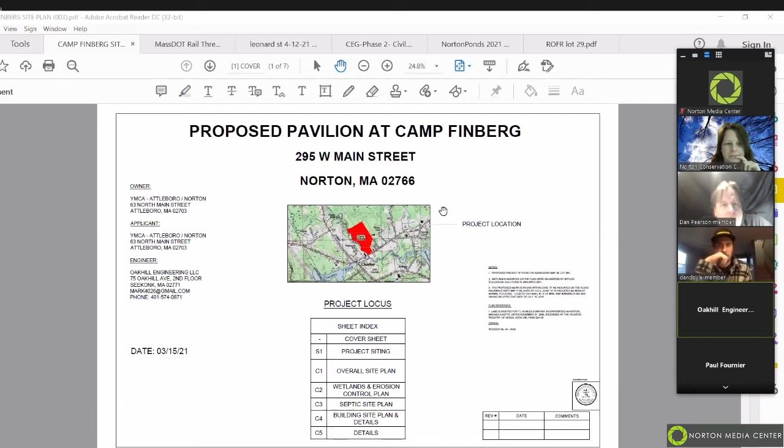Jen, if you want to go to C2, or you can start at C1. Yeah, that's fine. So the intent of this project is the Y hopes to build a 60 by 100 camp pavilion. It is basically a pole barn structure. It's uninsulated, just a one-season building.

The goal for this is to be able to give kids more shelter in inclement weather. This structure is actually being built on an area of the campground that was supposed to be a tennis court and never ended up being a tennis court, so it's just a large paved area.

So what we're intending on doing on this project is building the structure and removing the remaining pavement, so we are going to reduce our impervious footprint on this site. The other thing we're going to do is there will be restrooms out in this area. Currently, the closest restroom is the Lodge House, which is almost 1,000 feet away, so we are putting men's and women's restrooms in this building.

With that comes some infrastructure upgrades. That includes a service line that's coming off of their existing 8-inch main, traveling down the gravel path to the building, and there will also be an associated Title V septic with that building, which will be found, as shown on the plan, to the north of the camp pavilion.

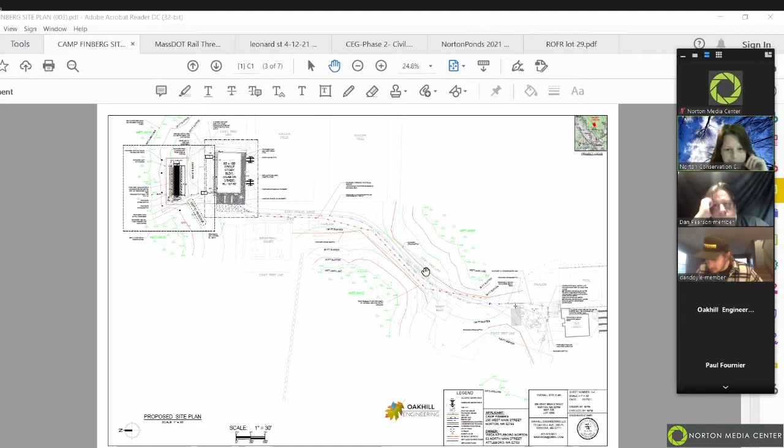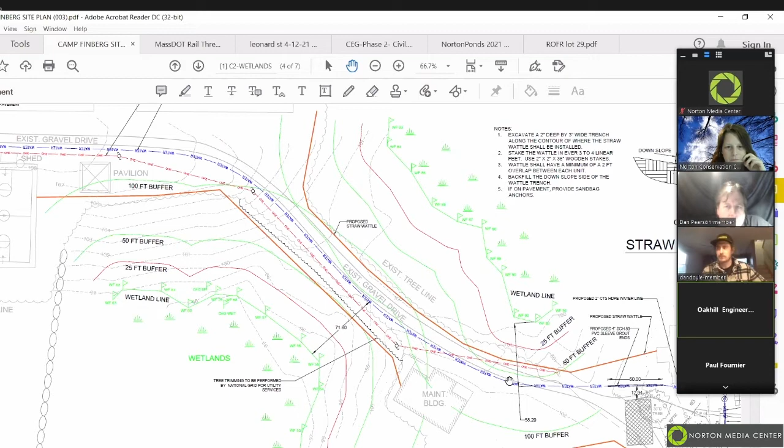That's as close as we get. Most of the work will be falling within the 100 to 50 foot buffer zone for the utility upgrades. Where we're installing the septic system will fall within the 100-foot buffer. None of the septic components will fall within the 50-foot buffer, but there will be some grading and tree clearing associated with that.

The reason we chose this area for the septic, we dug other test pits around the property. We dug to the west behind, going towards the stream where the basketball courts are, and that material is actually a different type of material. A little bit south, right where it says existing tree line and where my scale is — in that general area is where we originally wanted to find decent material. We did not find good material over there. It was glacial till with really high groundwater.

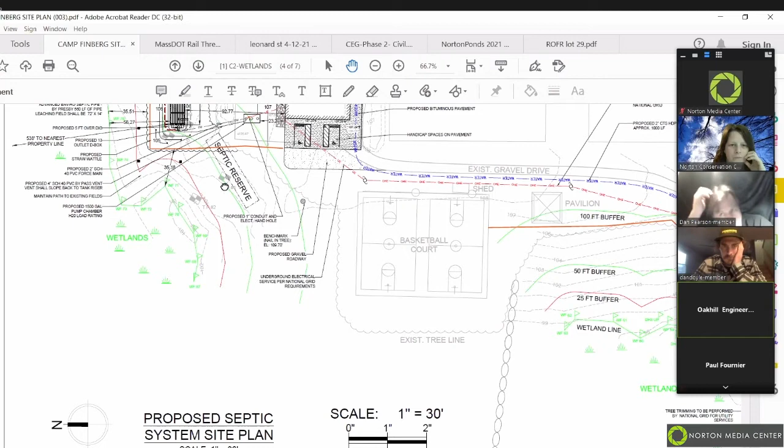As we went more towards the site, we then found the test pits that are logged here, and they were found in sandy, good draining material — higher groundwater, but good draining material. Up there, we didn't really investigate as much, just the logistics of the site, because there's a drainage swale around the sides. We didn't want to have to pump and go through that area.

Also another reason why we picked this area is it gave us enough distance between the existing tree line where we could still shield it with a tree line area. This system will be a little bit raised because of the high groundwater, and we wanted to be able to shield it visually.

Okay, all the work total is less than an acre, is that correct? Correct, yep. And no changes to the swale? No changes to the swale, no — well, except for this, what's happening here, we're maintaining the swale. We're going to put a little bit of an earth bridge so that the kids can cross it and they're not running through the swale. And then there'll be a post and rope fence that kind of corrals them there.

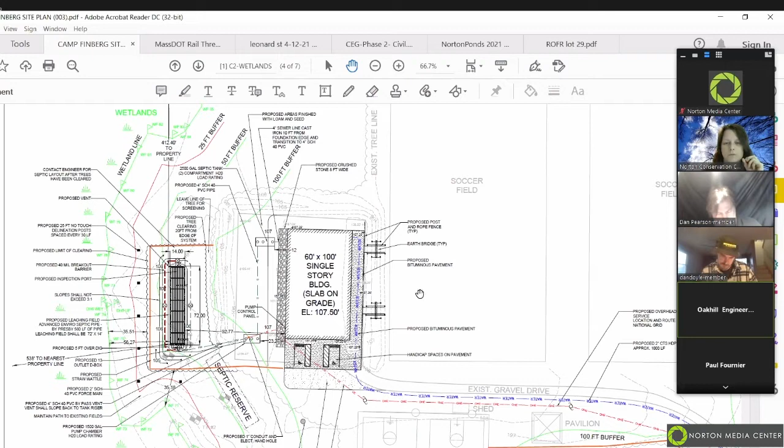Okay, is there a detail for that? Yep, go to, I believe it's on the last sheet. Don't hold me to it, but...

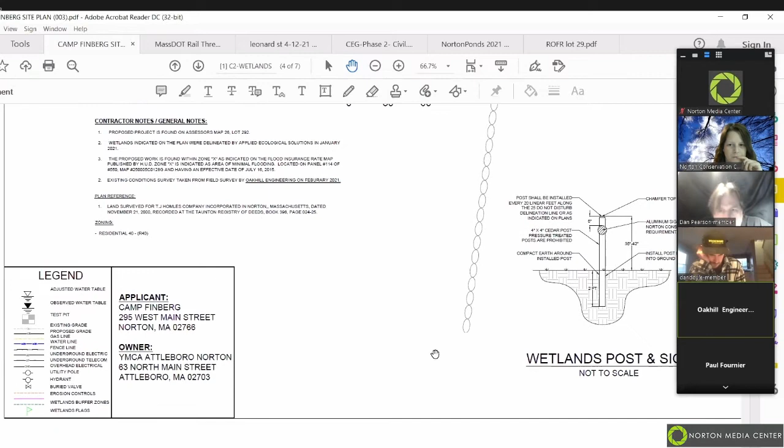This was the plan you gave me for presentation. Oh, okay — if you know the big set that I get, or the PDF I had sent the other day, it had I think 7 sheets in it. All right, so you think it's on the last plan?

Yeah, it's likely on C5, and it's also called out. More details are called out in elevations, called out on — I believe it's C4, and that's the building zoom-in portion.

And is this a culvert underneath here? Yes, that is an HDPE pipe. What size is it? I believe it's 18.

Okay, and just that the post, the no disturbance zone visual barrier — the post should be up here at the edge of work, at the limit of work. Okay, so you want — yep, that's not an issue. So yeah, it's on, Jennifer, it's on C4.

And we call out for an 18-inch HDPE N12 dual wall pipe. It's a 20-foot stick.

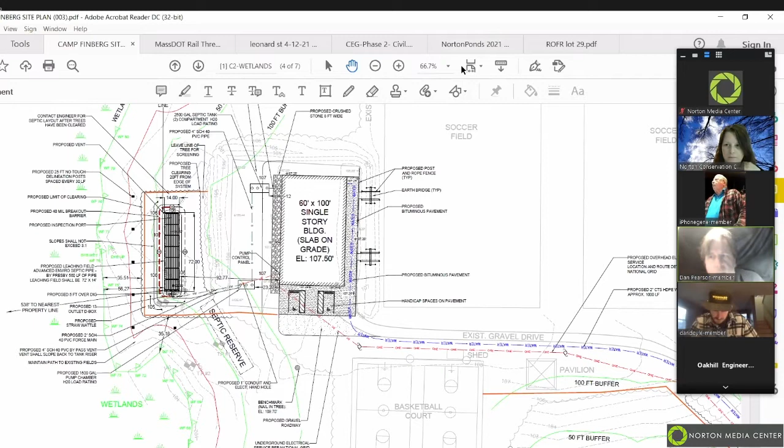I see participants, but I don't see anything in the chat box. So does that mean we're free and clear? I guess I'm supposed to look for hands. Yeah, the raise hands button is also under the participants tab at the bottom, next to the yes and no's. Okay.

So will that show up automatically? It'll show up in your little Brady Bunch box, in the corner. Okay, there are no hands raised, Dan. Okay, thank you, so I don't see any hand raised.

I guess then we should entertain a motion to continue file 250-1074. What are you continuing for, Dan? Are you looking for other information, or do you have any other questions? If not, you can close.

I'm sorry, when I say continue, what I meant was, would anyone like to make a motion to close? I'll make the motion to close file number 250-1074. Dan Doyle makes a motion to close. Do I hear a second? I'll second, Gene Blood. Okay, motion passes.

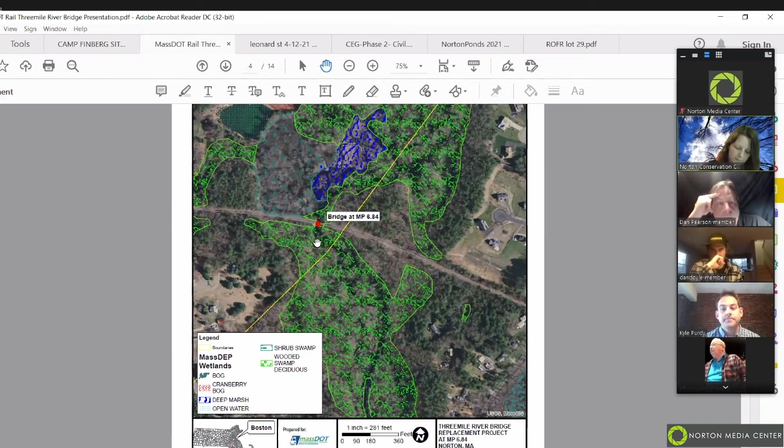We'll get a more specific delineation map later, but this is just the Mass DEP wetlands layer. So you can imagine next to a heightened embankment, you have BVW on both sides of the embankment. And our widening will take place within just the 100-foot buffer zone to BVW and bank, as well as the riverfront area, but there will be no impacts to wetlands or water bodies, or the bank. Thank you, yeah.

So the blue line is perennial stream, a tributary to Threemile River shown on the top half of the site plan. The orange is not only our temporary erosion control - here we have coir log at the toe of slope - but also the addition of ballast to widen the embankment and fill in some of the natural swales that come from off of the track. And then the green is delineated BVW.

So you can see a majority of our impacts here. We total within the 100-foot buffer zone, 5,300 square feet of permanent fill, and that's within MassDOT's existing right of way.

Is this the 100 foot? Yep. And is that also the inner riparian? Yep. And then your purple is the 200. Yeah. And then you can see that very thin line - there's a little bit of embankment filling right adjacent to the existing track right now, but a majority is it to maintain the stability leading up to the bridge.

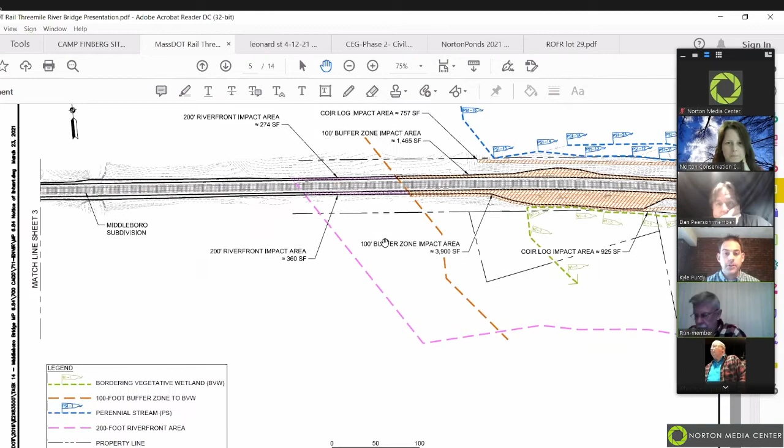So then if you go to the next sheet, we wanted to provide this to the commission so they fully understand the purpose and need of the project. So this is the bridge replacement. It's deteriorating, and that's being handled with Mass DEP underneath the water quality certification.

So as part of the bond bill, we wanted to lead first with the track widening before we go ahead and show DEP these associated impacts that will require water quality cert. So you can see similarly there's widening next to the adjacent abutments, but just wanted to give a better overview of what's delineated on site, what exists. This is the main portion of Threemile River, as well as associated BVW on either side located at the toe of slope.

And then if you go to the next sheet, you can see that dotted black line that comes in at an angle - that's the municipal line. So here's just showing just a laydown area that's already cleared. Doing our field reconnaissance, we saw that this would not require any tree clearing to stage material in this area. And then also east, you see there's also track widening, and this is all in Taunton.

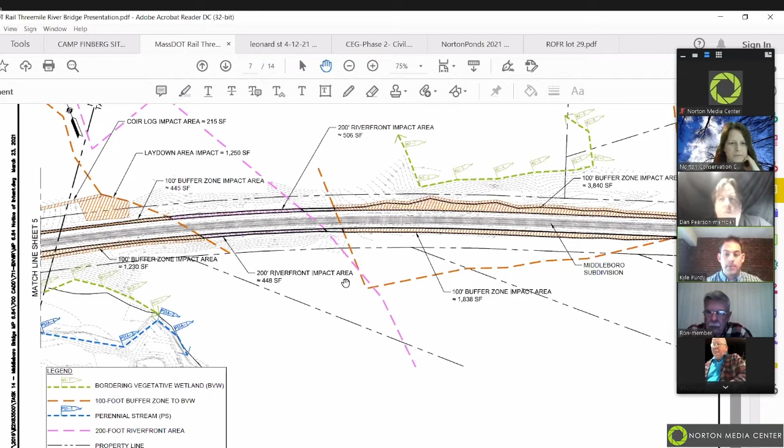That's being permitted underneath a separate Mass DEP number tonight. And then if you go to the next page, you'll see the impact areas specific only to Norton are highlighted here. So you see that the one column that shows ballast, so that's permanent impacts, and then coir logs is our erosion control. So you can see permanent impacts total 5,365 square feet. And then for riverfront area, the total permanent impact is 634 square feet, that's the last little bit that was on the most western end of the project.

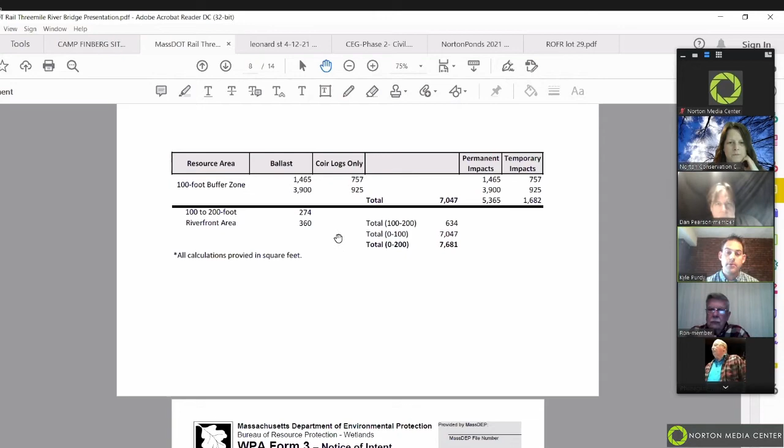That light purple. If we keep going down, I just wanted to highlight that on the DEP WPA 3 form, we checked BVW, but we really just wanted to show buffer zone only impacts. I know this is kind of tough to fit on one line without going to the next one, but we thought this was a good opportunity to highlight our proposed buffer zone impacts, as well as at the bottom of the page, the riverfront area impacts.

Okay, so riverfront is in the correct place, but buffer zone, you don't typically put the quantification. This makes it look like you're altering BVW, and you said that you're not. So if you can revise that one page, that would be great. Okay. Yep. Of course. Thank you.

If you keep scrolling down, I think we get into some photos here. You know what? I'm sorry, before we go there, can we go back to the plan and show us BLSF, because you don't have anything there. So BLSF we're outside of.

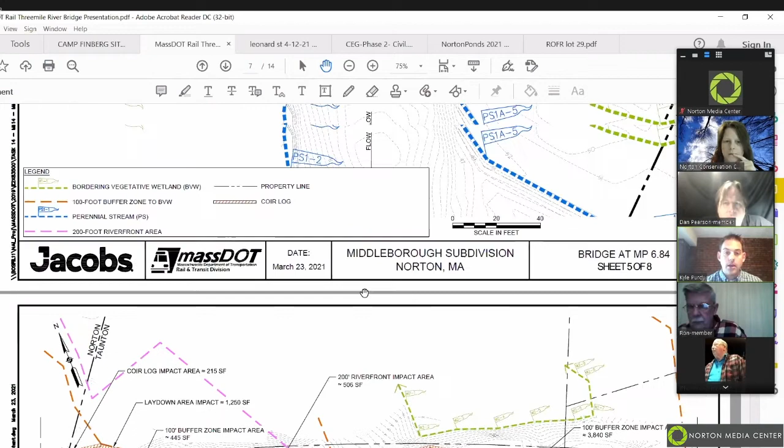So there wasn't a flood impact study done for this segment of Threemile River. We're about 1.5 miles north of where that study came from. But as far as the elevation, we calculated it off the 100-year storm event, and all of our work is done above that elevation. So we're not within either the mapped plan view BLSF or below the BFE. So the project poses no impacts to floodplain.

You've done the calculations according to the regulations 10.57? Yep. Okay.

Hi, this is Tom Page. Just want to note we're actually extending the bridge to get out of the impacts. If you look where it says existing bridge abutment, that's actually where the new abutment is going to be. Yeah.

Okay, and so the elevation that you came up with for floodplain, is it marked on this plan somewhere? It is not. We have a cross-sectional drawing that we're using in the water quality cert, but this particular work of the replacement of the bridge is exempt from the WPA. So we can certainly share that information because we're using it for our next permit. But yeah, we're above that calculated elevation.

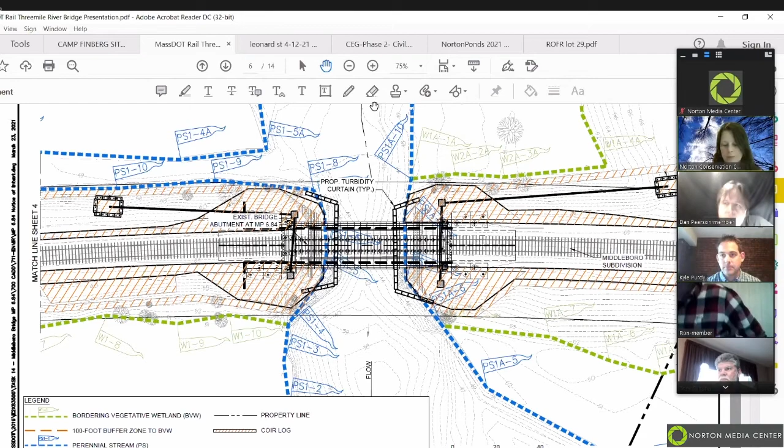Thank you, instead of going through 350 pages of a full NOI. Well, it's good that you put so much detail into it, but it's a little confusing where you say we're exempt, but then you filed for a permit, and then trying to figure out, well, what are you actually asking for a permit for? So if you can separate that, that would also be helpful.

If there's, no, sorry, go ahead. No, by all means, Dan, if there's. No, I was just wondering if you were done, or is there? I was just, there's a few photos here.

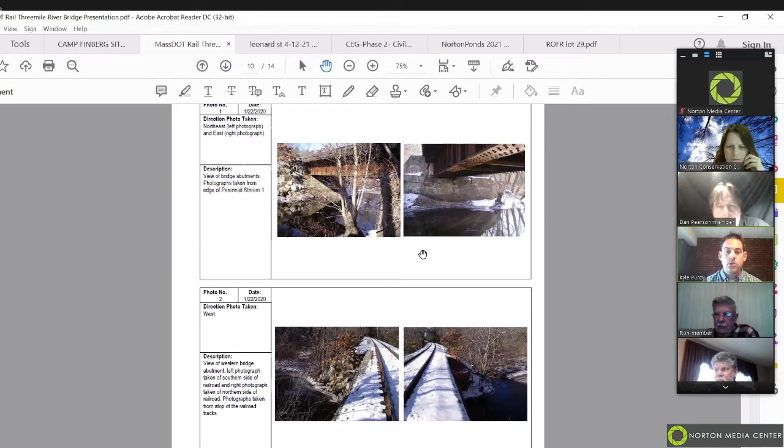So the top pictures, you're looking underneath the bridge. The second photo here, you're looking westward from the municipal boundary into Norton, and you can kind of see the side slopes. And then if you scroll down, the top picture is standing in the BVW looking at the southern toe of slope, and then the bottom one is your northern toe of slope, on the side.

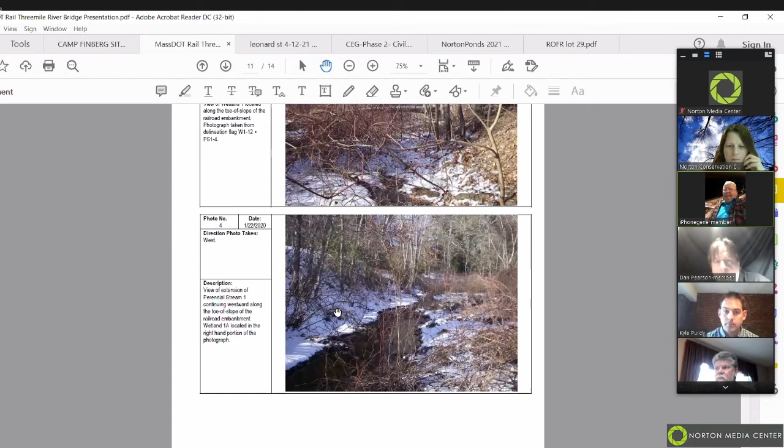Is this the section where you're bumping it out? Yeah, but if you scroll down one more, you can see that we're staying within kind of the tree line. So we'll be widening, but we're just kind of filling in the gapped areas where there's snow. We're not going to be going all the way down to toe of slope and have to build back up. It's just extending it out so it's all at the same grade as the existing rail right now.

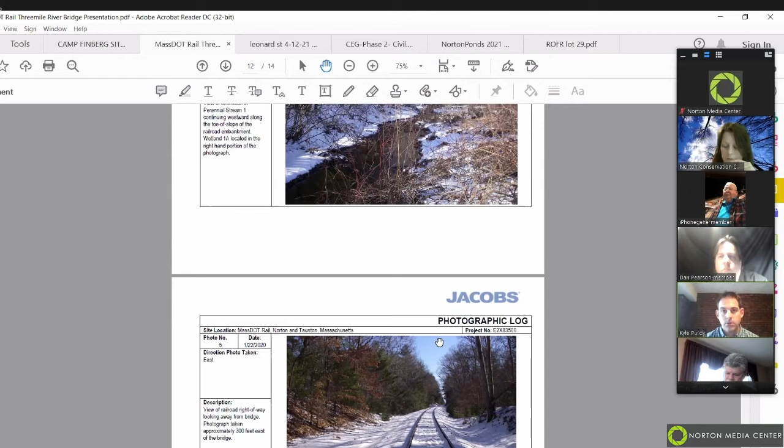And I noted for the commission that we do need to schedule my site inspection with DOT. So I think some of this will be a lot clearer once I'm able to see it.

Do members of the commission have any questions or comments? Just a comment that the track is not really being widened. It's the road bed, correct? Correct, yeah. We're not increasing gauge. Correct.

If there are no other members of the commission, members of the public - and I actually have a quick question. So in the narrative, it looks like the project is being characterized as a limited project, as a water dependent use, and I just wondered what the water dependent use is. The bridge replacement, and then the ballast, the embankment widening is needed for the stability of the replacement.

So Carrie, in your packet - it's attachment B. I'm trying to flip to it now. So the definition of water dependent use. I was also looking for the water dependent use definition and I didn't find that before this. So it's in your packet, after the section on limited projects. Ah, there it is. All right, thank you.

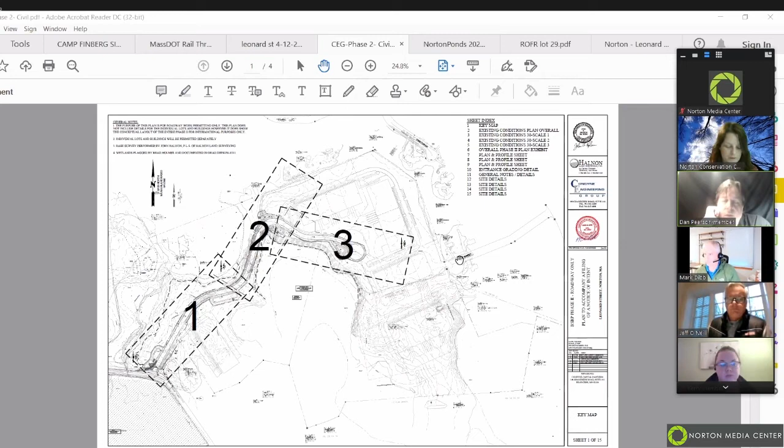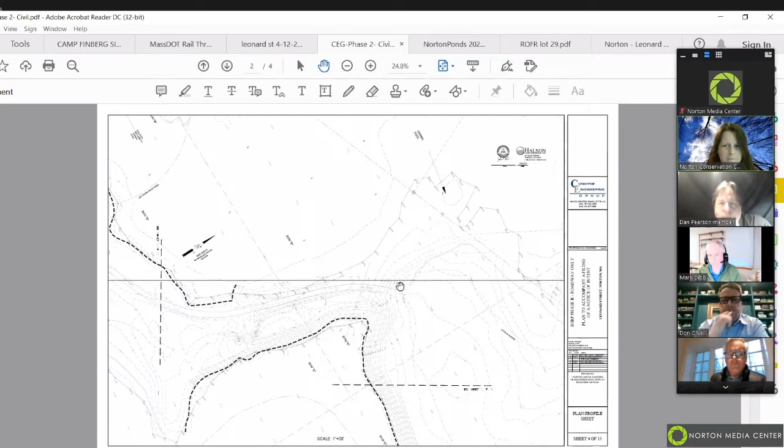When you did the site inspection, you had talked about a retaining wall in the existing cart path. Go to the next sheet. I'm trying, it's not moving anymore. It looks like there's only 4 pages on this. This is the one you just sent today. Yeah, that's not it, I had sent one when we resubmitted. I do have the colored one from the original submittal.

Can you see this plan with the highlighting? It's not coming up yet. Okay, hold on, give it one second more. It's one of those nights where we have to click it twice.

Okay, so this is the page where you have the existing cart path here, right, somewhere over here.

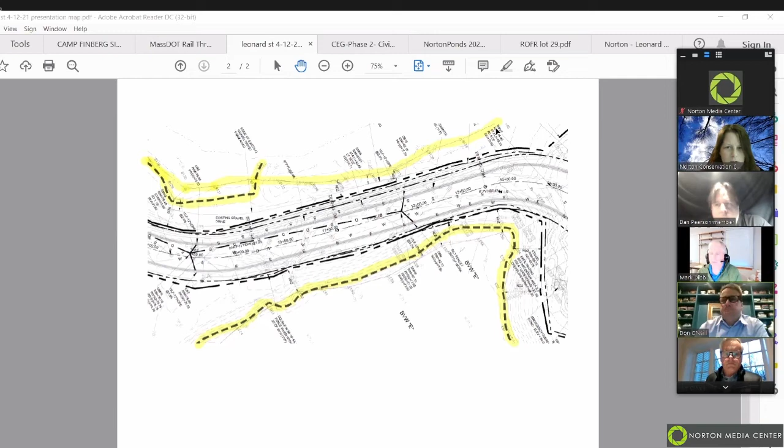And then that's your proposed limit of work. The yellow is the wetland boundary. Let me see if I can make that a little closer. And then it looks like you're about 12 feet away from the wetland.

Correct. So right where your hand is, just a little bit to the left, there's a 10-foot dimension. That is the edge of the existing cart path to the wetlands.

And then to the right, there's a dimension, an NDZ dimension. It says 12.7. That is our new limit of work.

I did, in a response back on January 18th, provide a response to comments, 6 different comments regarding the site walk, and requested, since the grading regarding this question is from the hand right now over to the edge of pavement, and since this was already in the vicinity of the cleared gravel driveway, we were requesting to maintain the grading as shown on the plans.

We do have a wall, if you remember on the site visit, we centered this roadway at the highest point possible through this area. We do have a wall on the other side to minimize the distance, and you'll see there's an NDZ with a 15 or 25 foot, yeah, right there. So we did maintain the minimum 25 foot, or your no disturb area.

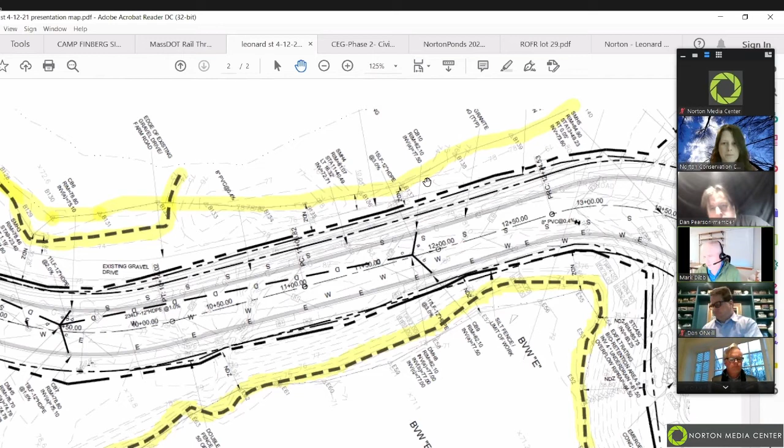Okay, and so the commission, you just need to decide if you're okay with that, and then decide about the visual barrier. You typically have a fencing requirement. In the past, they've done posts. So you would just need to decide if you're going to allow the posts again, or fencing in some spots, or all posts. Those are the 2 things that I needed to know from you to finish the draft order. And what would be the argument against just doing what they've done, if any? There's no argument either way. It's just what do you want me to put in the order?

We're okay with the posts. We're used to that, and we can get those installed as needed.

Okay, so anyone have anything? Just remembering walking the site, I don't see any problem with just keeping it at the existing grade and doing without the retaining wall. Just from months ago when we walked the site, that was my thought.

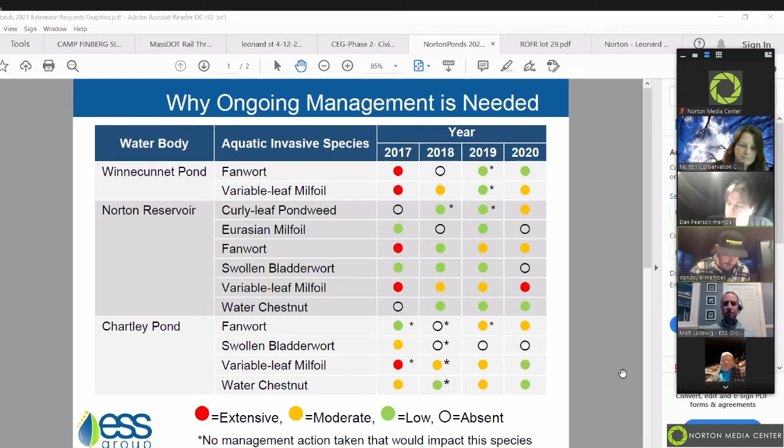I'll entertain a motion to issue the extension. I'll make the motion to issue the 3-year extension for the Town of Norton aquatic plant management program. Dan Doyle makes a motion to extend. Do we have a second? I'll second. Carrie Snyder, I think, seconds the motion. I'll take a roll call.

Carrie Snyder, aye. Dan Pearson, aye. Ron O'Reilly, aye. Dan Doyle, aye. Gene Blood, aye. Motion passes.

Next is an extension request for a 3-year extension on the amended order of conditions, file 250-0980, Town of Norton, South Worcester Street / Chartley Pond, map 26, parcel 8. The proposed project is an aquatic plant management program at Chartley Pond to treat and remove aquatic invasive plant species using a variety of methods.

Before we start, Ron, do you need to recuse yourself as an abutter? I can. Because then we don't have enough members to discuss this tonight, we'd have to continue it to the next meeting. I voted on it previously. Oh, you did? Yes, okay. So we're okay then, Ron is not recusing himself? No, correct, he's not.

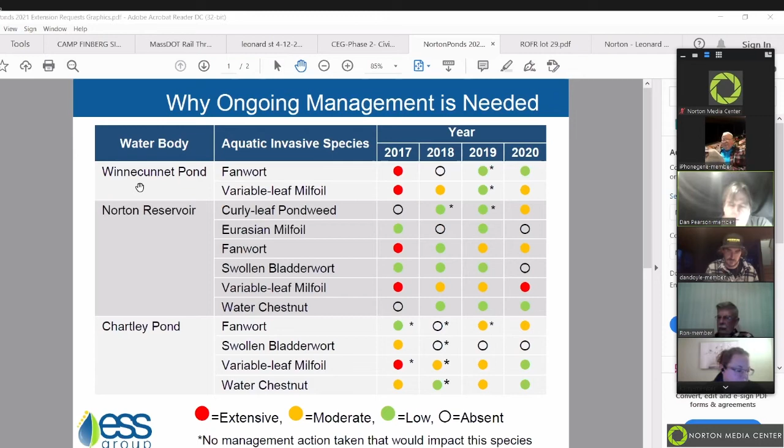Okay, next we have orders of conditions and orders of resource area delineation. Let's see. Request for partial/full certificate of compliance. DEP file 250-0943, Town of Norton, off Plain Street, map 19, parts 2 and 3. The proposed plan is to construct a new water treatment plant with associated water piping within the 100-year floodplain, riverfront, and within 100 feet of wetlands.

And this has yet to be inspected, I take it? Well, I had sent an email last week asking about 3 of the conditions and didn't receive a reply, so I have not done the inspection yet.

Okay. And is there anyone here who wants to speak about this? Yes, so Tara McManus of Weston and Sampson. I also have Mel Higgins, our senior environmental scientist, professional wetland scientist, with me. And I believe Frank Fournier from the Town of Norton Water and Sewer Department Superintendent is also on the line. We just wanted to answer any questions that might still be outstanding. I know that Mel sent an email to Jennifer today responding to her questions from last Wednesday afternoon. So I can just read through those responses if that would be helpful.

The first question she had was about condition number 36, which states monthly reports not submitted in time shall be deemed a violation of this order, and the commission or agent may cease all work on the site until the reports are received. This project has actually been around for quite a while. We had a 3-year extension and a 1-year extension last year. The actual work that was mostly concerning for the Conservation Commission was the directional drill across the river.

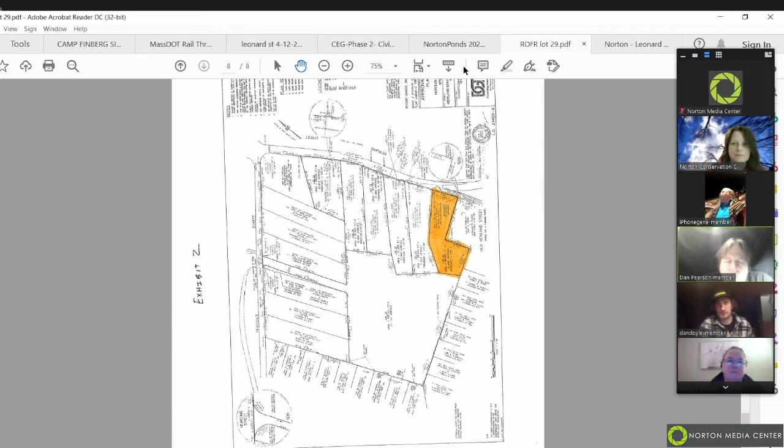Jen, did you want to, or is there anyone else who has any comments on this one? Comments, discussion, thoughts? Any members? Assuming it's the same answer you gave last time. Yeah, if it's not abutting any other protected land, I don't see any reason why we need to assert our right of first refusal.

So we just, do we need? Is that your motion, Carrie? That is my motion, thank you. Carrie Snyder makes a motion to not recommend exercising the right of first refusal. I'll second that, and Dan Doyle seconds.

We will take a roll. Carrie Snyder, how do you vote? Aye. Dan Pearson, aye. Ron O'Reilly, aye. Dan Doyle, aye. Gene Blood, aye. Motion passes. And we're on to old business.

We don't have much old business. You did get an order today, sorry about that, but it was today. The draft order for Leonard Street. I don't know if you had a chance to look at it. If not, maybe you can take a look at it tomorrow. We'll actually issue when Melissa comes back from vacation. So if you see anything in it this week, just email me separately so I can make those changes.